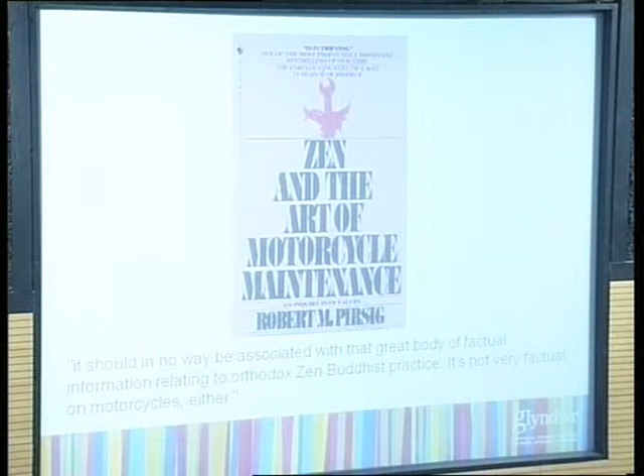Well, how does that relate? Actually the title has almost nothing to do with what's in the book. As the author says in his introduction, it shouldn't be associated with the great body of factual knowledge about Zen Buddhist practice, and it's not very good on motorbikes either.

And that's a bit like this talk, in that this is a personal journey through things that I think are interesting in the aerospace industry. So it's not very historically accurate.

Also I'm aware that there's a wide variety of people in the audience. I see some people here are stress engineers in composites, and others are from a completely different background. So I've tried to keep it as general as possible and not put into too much detail. Hopefully it's factual, but it won't go into too much detail.

One thing which comes through in the book, however, is the pursuit of quality and what quality means. And you'll find that quality and how to make things well is intrinsic to what I do. The other thing that comes across, which is probably not so good, is it's clear that the central character has sometimes been completely mad. So hopefully that doesn't come across. They've clearly had some kind of a breakdown.

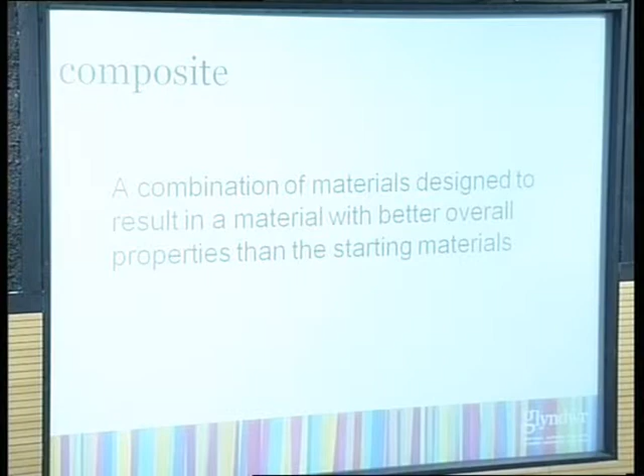Let me start off by defining what a composite is. My definition, which is fairly commonly adopted, is it's a combination of materials designed to result in a material with better overall properties than the starting materials. So we're putting things together, and in some way we're trying to make a product which is better than the things we started from. The things we tend to put together are some kind of reinforcement, and then something to protect the reinforcement.

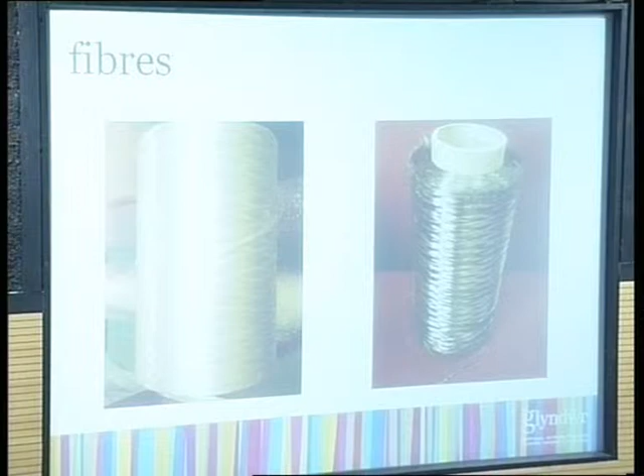It might be long fibres, it might be whiskers, it might be particulates. This is what fibres will typically look like - the one on the left is glass fibre, and the one on the right is carbon fibre. There's a whole range of ways of turning these into a composite, and if anybody's interested, we've got a very good MSc course you can come find out about. On the whole, we tend to weave the fibres together in various textile structures and infiltrate them with resin and cure them.

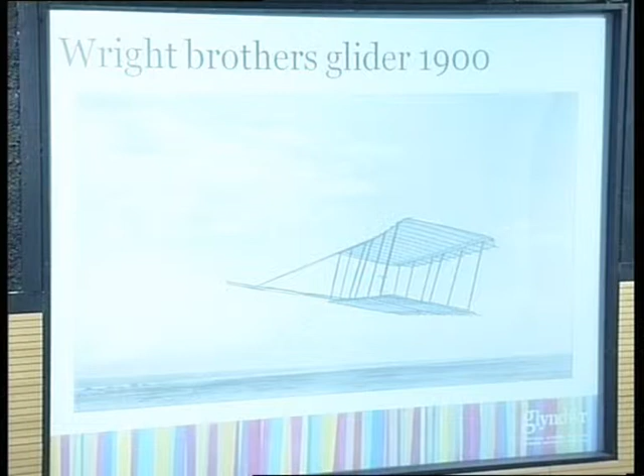But clearly before they made planes, they did something else - the Wright brothers were bicycle makers, they had a bicycle shop. But what do we get from the Wright brothers?

They put together airplanes from wood and from cloth - a wooden frame and then cloth over it to provide the flying surfaces. They changed the shape of the wing in order to control it. Nowadays we use flaps, but actually there's a lot of discussion and research work on wing warping again, under a different name, but that's what it is.

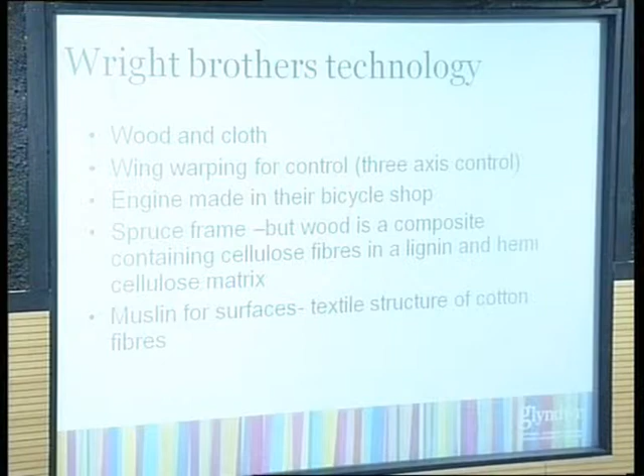They also were the first people to understand control. They made their own engine in their bike shop, with a wooden, spruce frame. But if you look into the structure of wood, wood itself is a composite - it's essentially cellulose fibres in a lignin matrix. When you make paper, all you're doing is extracting those fibres out and putting them together. And then they used muslin for the control surfaces.

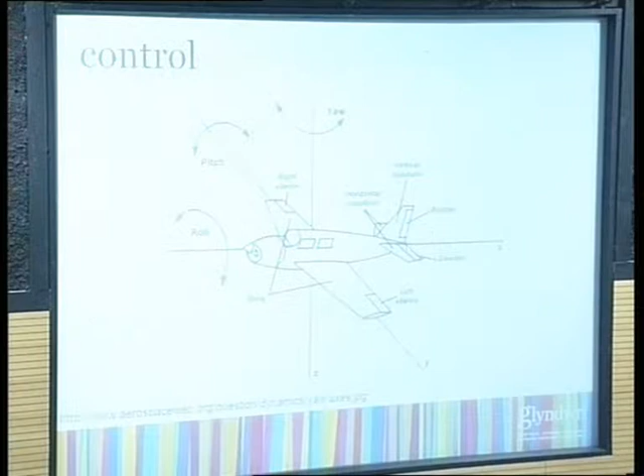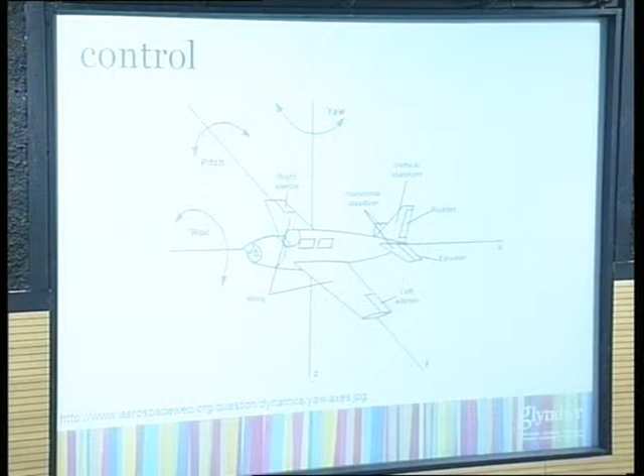This is the three directions you can change in flight: roll, pitch and yaw. That was really understood first by the Wright brothers from their experiments with a kite. But going back to the wood fibres - well, wood fibres are just paper when you put them together.

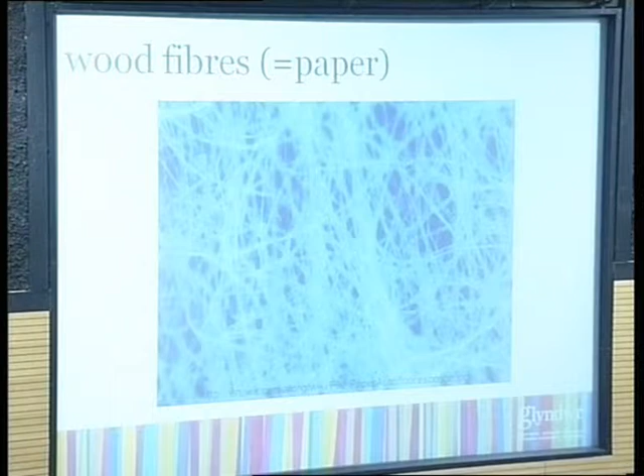Here again there's something fortuitous, in that before I came here I lived for about 4 years in a paper science building with a paper machine, which is the hottest, dampest thing you can imagine, amongst paper scientists. And one of the really critical theories of composites is known as the Cox theory, proposed by H.L. Cox in 1952. The Cox theory is all about paper, not composites, and it turns out it works really, really well for composites.

It's dreadful for paper, it doesn't work at all, and that's because the assumptions are wrong. What Cox assumed was that the fibres were in some kind of a matrix, but you can see from this picture it's just a network of fibres that touch at different points. So composites and wood and paper are actually quite closely related.

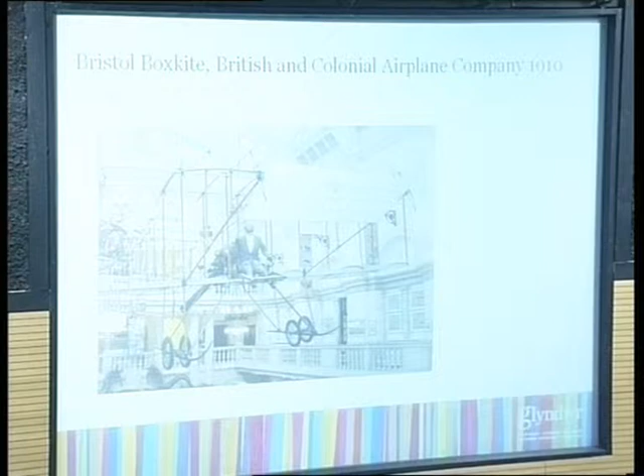So I want to move on a bit further and show you this picture. This is a Bristol Boxkite. That picture was taken in the museum in Bristol, and most of you probably don't know that I was born and bred in Bristol, so I spent a lot of time in this museum as a child. There are no longer any original Bristol Boxkites left, but there were 3 box kites remade for the film Those Magnificent Men in Their Flying Machines. After the production, one of them ended up in the museum at Bristol, one's in the Shuttleworth collection, and another one went to Australia.

So why am I showing you this? Well, this goes back to Sir George White. Sir George White originally ran an electric tram service. He had the first tram service in Bristol, and then he expanded out to London. He also went into the manufacture of buses.

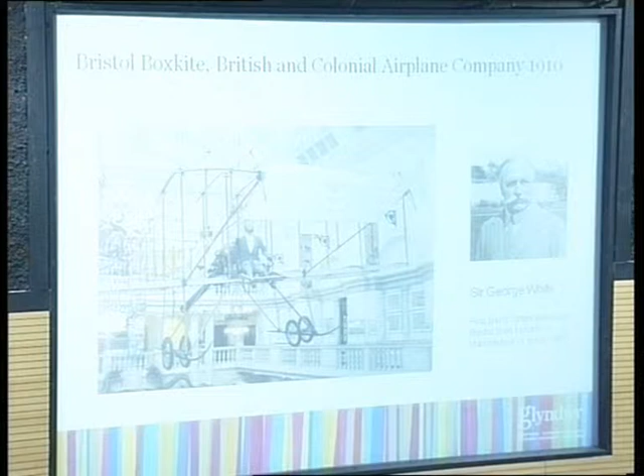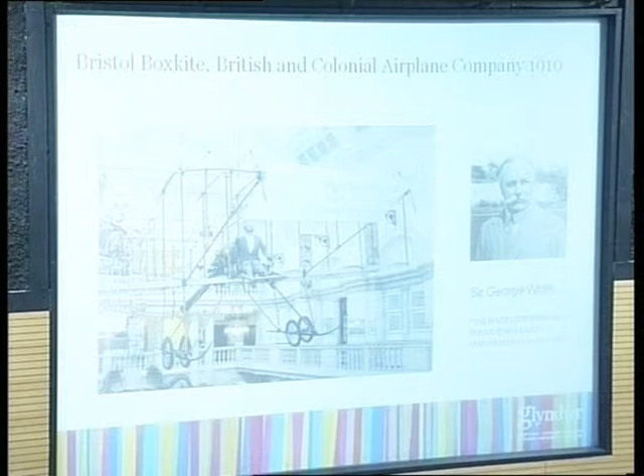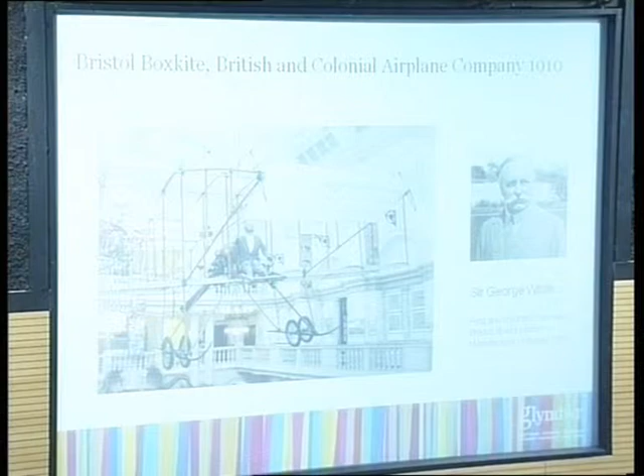As a child in Bristol, as a teenager, I went to a school in the middle of Bristol, and its playing fields were actually outside of Bristol, so we had to go by coach out to the playing fields. We used to pass the Bristol bus factory - okay, this was the 1970s, but it still existed then, it doesn't now. It was really odd because they had to move the buses around from place to place on site as they were being made. You'd often pass the site and there'd be a double-deck bus, but it would just be the floor and the wheels with somebody sitting on a deck chair driving it round from one point to another as it was being made.

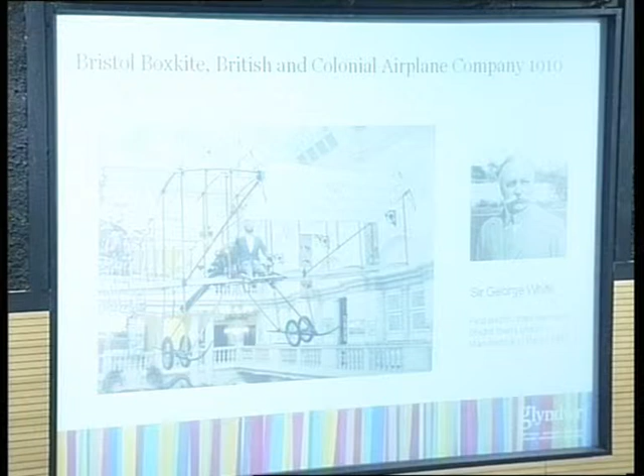Anyway, so Sir George White started building aeroplanes in a tram shed. The tram shed was in Filton in Bristol. Filton may register with some of you. The British and Colonial Airplane Company went through lots of changes. It became the Bristol Aeroplane Company, eventually became British Aerospace, who were then one of the founders of Airbus.

So actually, this was the first Airbus product. Now you may think that the madness is coming in again, but some of my time, as Leslie said, is spent out at Hawarden, where of course we get plentiful supplies of the Airbus House magazine, which I dutifully read when I'm having a coffee. And what did I find in November's issue but this: the landing gear systems test facility at Filton is named after Sir George White. So it's not just me that spotted that.

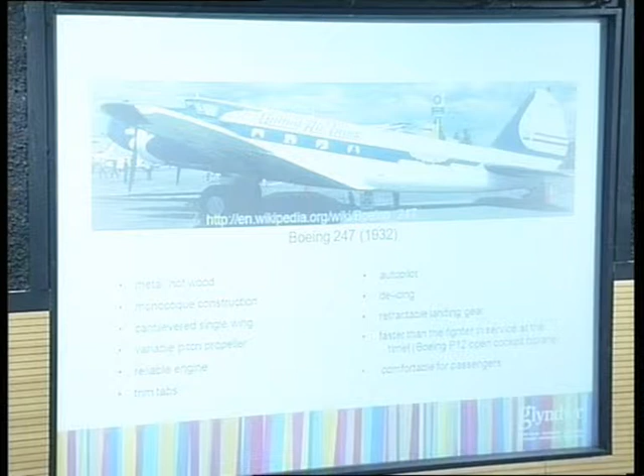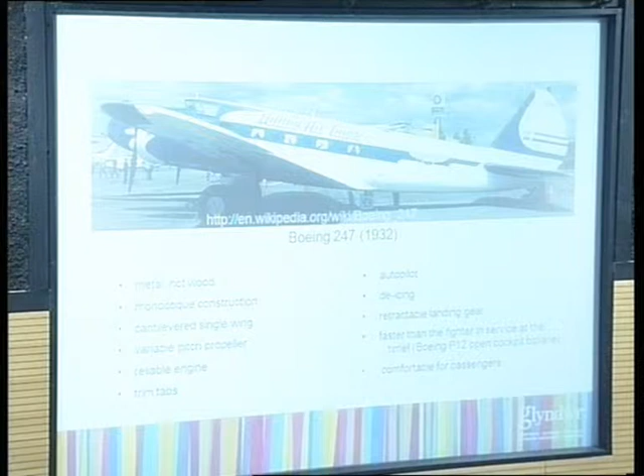So let's move on a little bit now. We had lots of wooden biplanes, and then suddenly on the scene came the Boeing 247, which was a revolution. Aluminium became readily available, and suddenly we went to a system which looks quite different - it's metal, it's got a reliable engine, trim tabs, an autopilot even then, de-icing, retractable landing gear, not landing gear that looks like it's been stolen off a pram, and it was generally quite comfortable. It was actually faster than the fighter that was in service at the time.

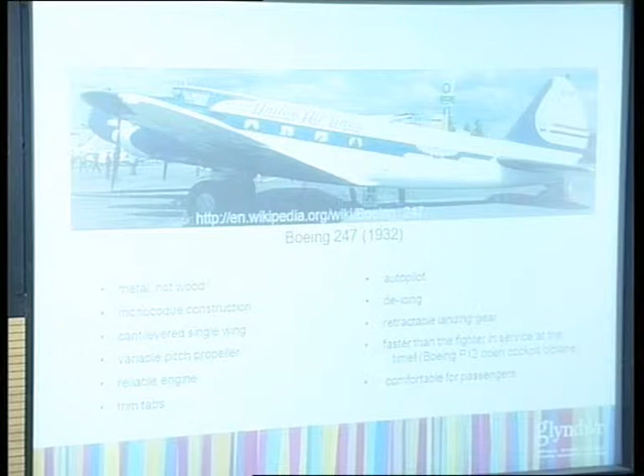Except that they've actually gone back, for some versions, to wood and cloth. There's a fleet of these run by the North Koreans, and they've gone back to wood and cloth because it's stealthy - there's no radar cross-section. A very simple solution. It's like when the space race was on, the Americans devised a very clever ballpoint pen to write in space, and the Russians took a pencil with them.

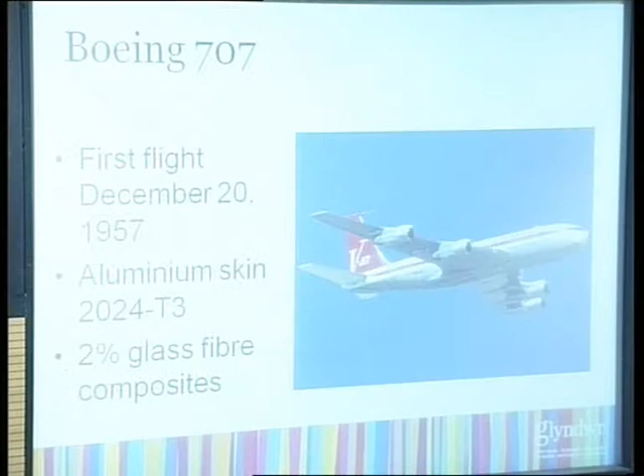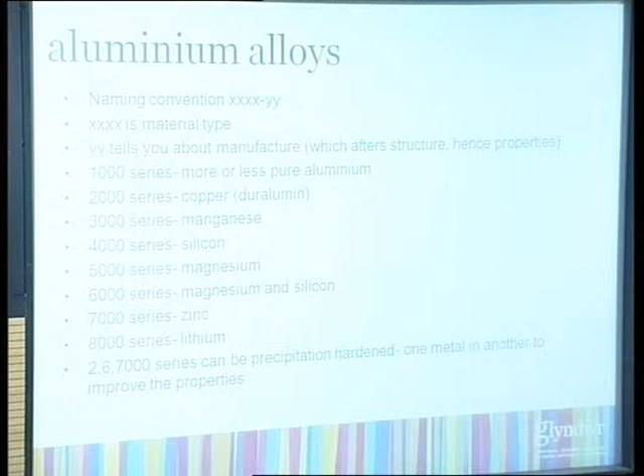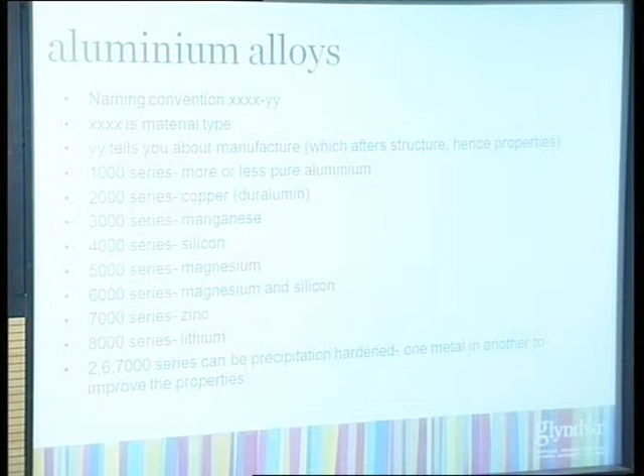I gave you the name of this alloy, 2024T3, and I need to explain what it is. Aluminium alloys have this naming convention, XXXXYY. The XXXX isn't a swear word, it tells you what the material type is, and the YY tells you about how it's been manufactured. There are various series, so 1000 is more or less pure aluminium going through, but some of these can be precipitation hardened, the 2, 6 and 7,000 series. And what we're doing is putting one metal in another in order to improve the properties.

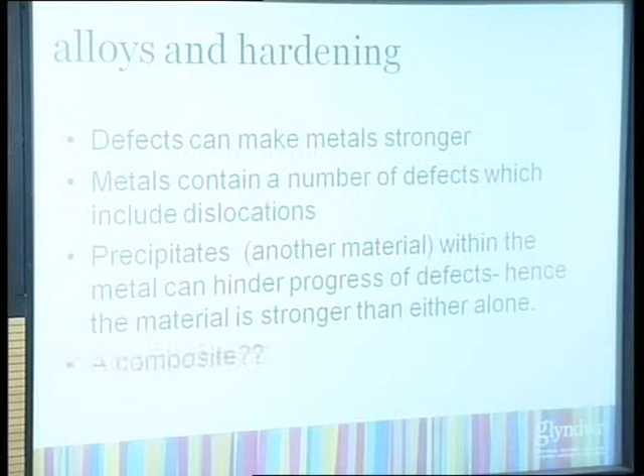Because in metals, if you have a pure metal, it's not very stiff or strong. What you need is defects, so we can put lots of defects in, and the defects are there naturally, and we can increase the number quite easily. If you stop the defects moving around by putting something else in there, then you can make it stronger than it was before. Okay, a metallurgist would tell you this is an alloy, but I'm telling you it's a composite, because that falls within my very liberal definition of a composite that I had before.

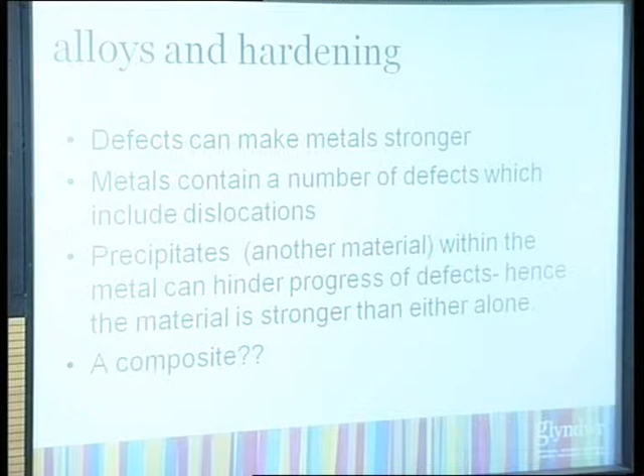Okay, so aluminium alloys, no, it's composite. So I'm just going to move through. The 737 came in '67, and the 320 came in, and there are a lot more composites used then, so some of the control surfaces and the back end are composite. And the 777, which didn't have so much in.

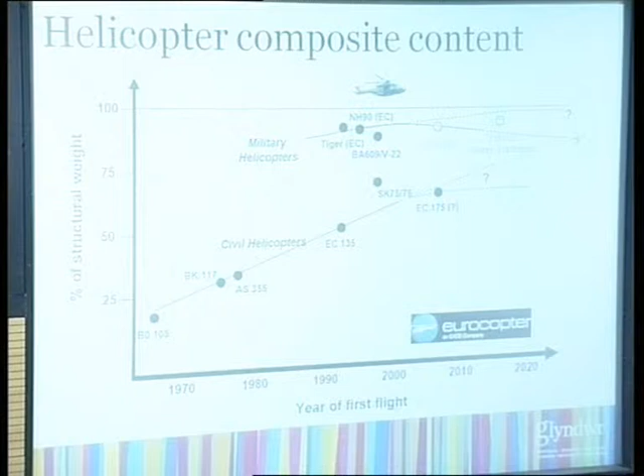So let's look at something else. Somebody I know at Eurocopter was kind enough to send me this slide. Actually, although we think we're doing quite well in commercial aviation, for 20 years there's been 50% composites in civil helicopters, and even more in military helicopters. And they still complain that they're difficult to work with, and wouldn't it be easier if we made this out of metal. But that's the way things have gone. Of course, in a helicopter, it's all down to pure thrust. There's not much in the way of aerodynamics, so you have to reduce the weight very quickly.

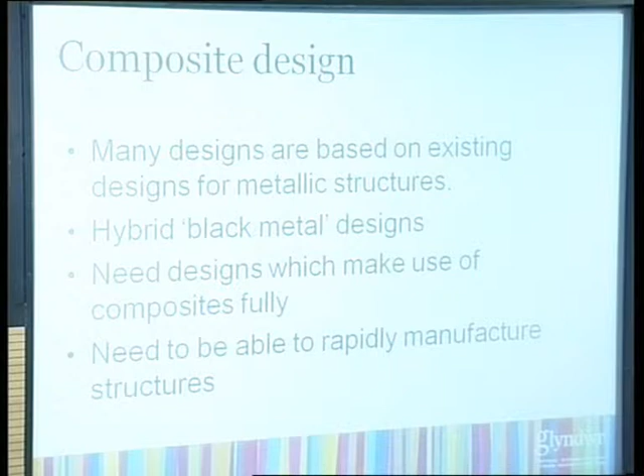Okay, so what about today's issues? What's important? Well, designing with composites is critical in order to get sensible manufacturable solutions. At the moment, we're going through an interim phase where a lot of the structures we make are hybrids between metals and composites. These are often known in the industry as black metal designs. And what we really need to do is move forward and use composites more fully, certainly in larger aircraft. That's quite a tough challenge, to make a big aircraft in just carbon fibre is tough, and there are lots and lots of issues. But we also need to be able to manufacture these rapidly.

So why are we going down the road of putting composites in aircraft? What is it that's driving us? Well, there's two answers to this.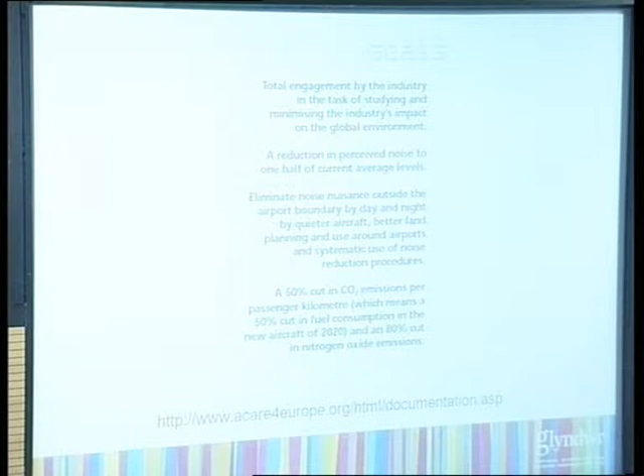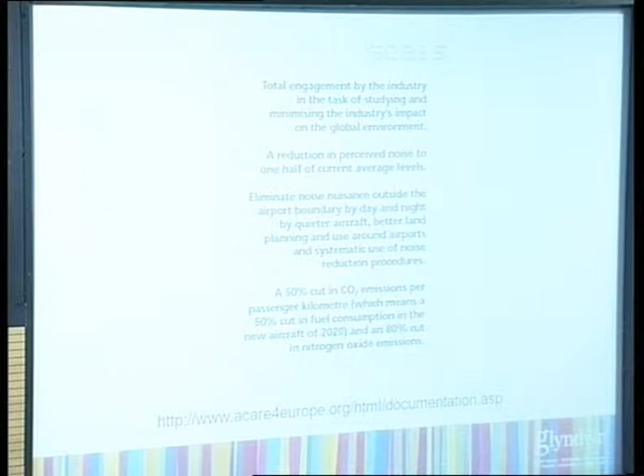One revolves around this, which is a vision for 2020. It's a document produced in Europe. This is an interesting document, but throughout it there are these little panels dotted around with various goals and targets. One of them, at the bottom here, is a 50% cut in CO2 emissions per passenger kilometre by 2020.

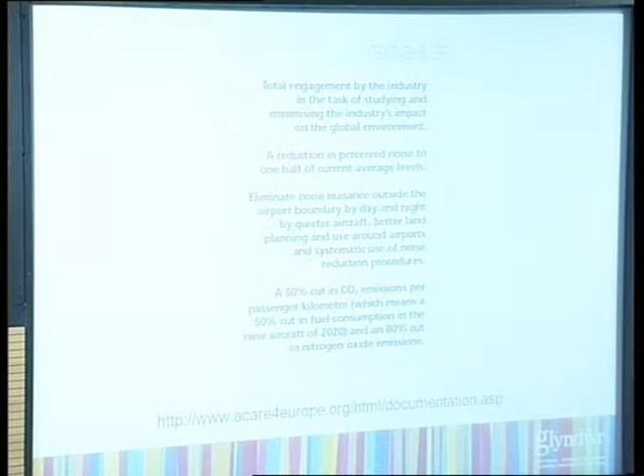That's a hell of a target. It's half the emissions. Oh, and by the way, you've got to cut nitrogen oxide emissions by 80% as well while you're doing it.

So how can we do that? Well, there's only one equation in here, so bear with me. The range of an aircraft depends on lots of things. One is the aerodynamics, how good the lift is compared to the drag. The thing in red tells you about the engines and how good they are, fuel consumption, temperature of the fuels, and things like that. And then the weight of the aircraft.

If you could halve the weight of the aircraft, you double the range. It's not easy. But if we want to reduce our CO2 emission by 50%, we've got to reduce the fuel burn by 50%.

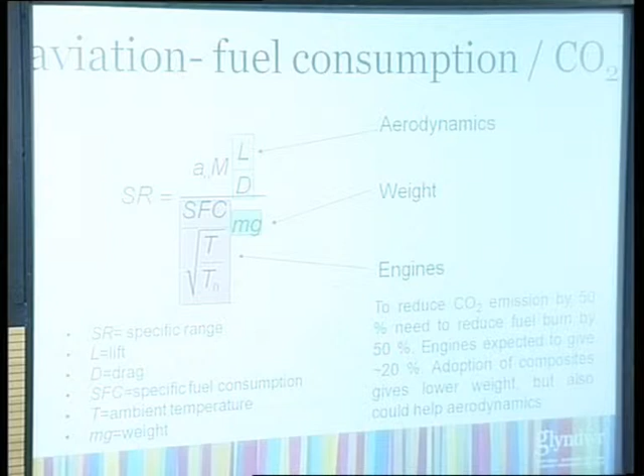The general view in the industry is that we'll probably get a 20% improvement by 2020 in engines. And don't forget, this is an ongoing process. It's not going to suddenly happen. The engines have been improving for years, and likewise with airframes, as different models come out, each one is a little bit better, a little bit lighter. So there's a whole range of 320s and Boeing 777s and so on.

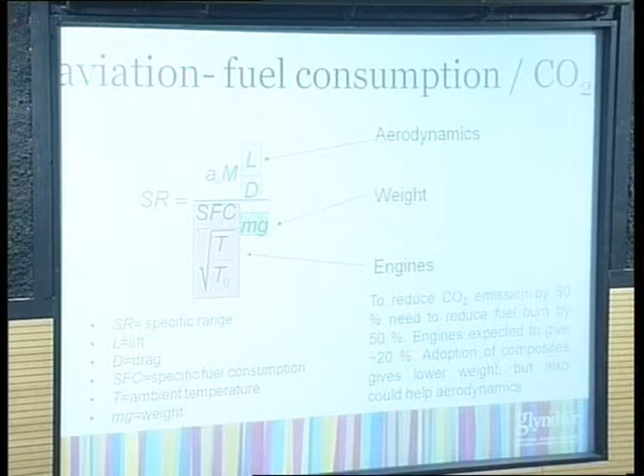But what we need is to adopt composites to give us lower weight, but it also helps with the aerodynamics. Well, how does that help?

And that's something that's quite easy to do with composites. If you want to do it in metals, it's much more difficult. There's a lot of machining to be done, and a lot of waste, and I'll come back to that in a minute.

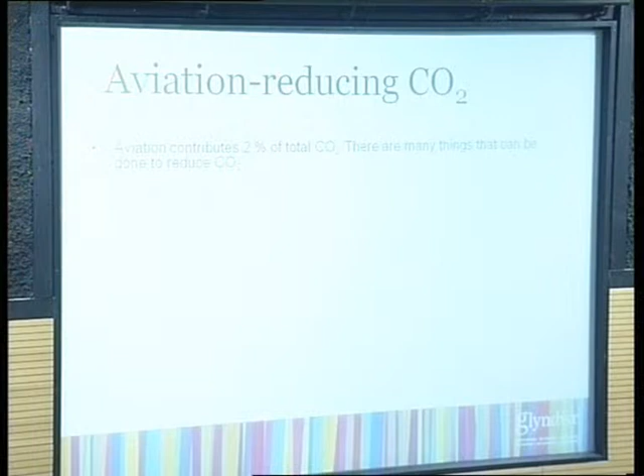So let's think about reducing CO2 and how we can do it. General estimate is that aviation probably contributes about 2% of global CO2 emissions. How does that compare? Well, it's a lot, but shipping probably contributes something like 4%. So you hear a lot of people talk about aviation and the carbon footprint, but actually the carbon footprint of shipping is twice as bad.

So what can we do? Well, actually air traffic management is important, the right choice of flight path. Eliminate unnecessary weight. So nowadays, rather than taking on boxes full of manuals, you take on an electronic flight bag, which is either an organizer or a laptop with all the manuals on the hard drive. And there's some other things that you perhaps wouldn't think of in order to reduce the weight of a plane.

One is to wash the engine out, which sounds mad. But you get a build-up of soot in the engine, and if you wash it out, you reduce the weight of the aircraft. Something like, well, American Airlines reckon that this saves them about 4 million gallons a year of fuel, just washing the engines.

Jet A, about an hour before the lecture, was £4.30 a gallon. At LAX, it's $6.94 today, and that translates to about £4.30 a gallon, which means you're saving over £17 million by washing your engines.

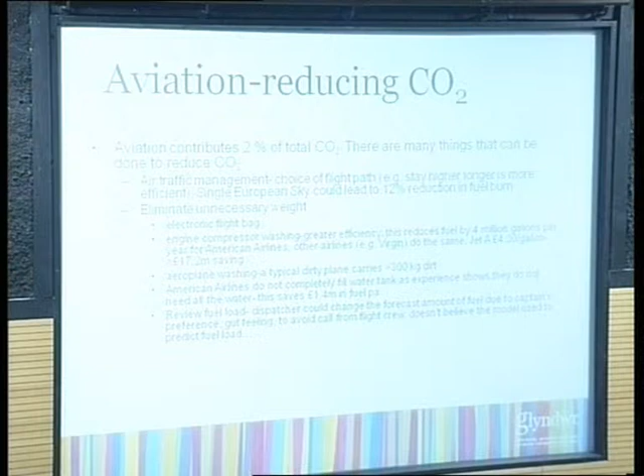The other thing is, don't carry things that you don't need to. For instance, American Airlines noticed that they didn't actually use all the water the plane could carry for service, so they fitted something on the hose. Filling up water on a plane is like filling up petrol in your car, you put a hose in and fill it up. They put in a little device which cost them £1, and it turns off the water when the tank's 3/4 full, because they don't need the full tank. They reckon that saves them about £1.4 million in fuel a year. And obviously, you're carrying less weight, so less CO2 emissions.

Also think about the fuel load, there are ways you can manage it. Maintenance also affects fuel burn. For instance, if you have to leave the power unit on because there's a fault somewhere else, that's costing you £4.30 a minute to run, and it's producing CO2.

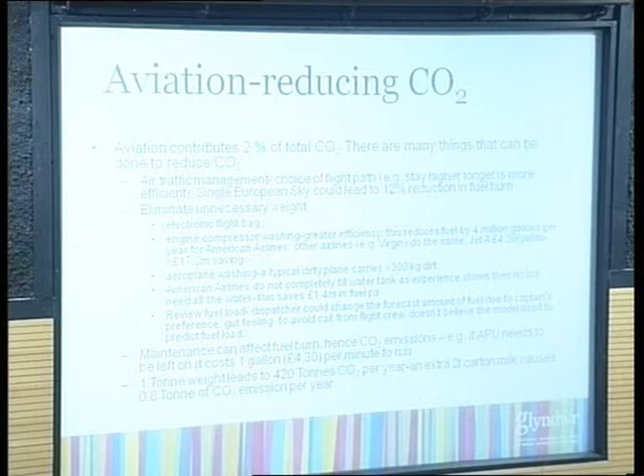Looking at what's important in materials, when you do some analysis, the thing that's critical for a wing, say, in bending, is the cube root of the stiffness divided by the density. If you come on the MSc, you get to prove that.

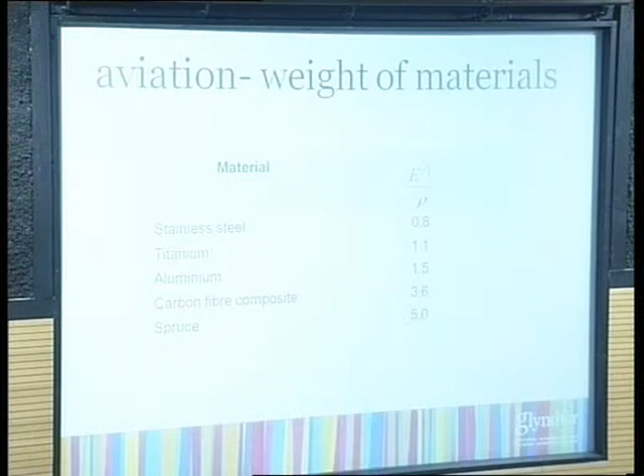So let's look at some values. There's stainless steel, titanium, aluminium. Stainless steel has been used in early planes, titanium is used particularly around the landing gear and so on, but aluminium is in most of the planes flying at the moment. But you see that carbon fibre composites give 3.6 against 1.5, so that's a hell of a difference. That means you can make your plane much lighter for having the same stiffness and strength and structure.

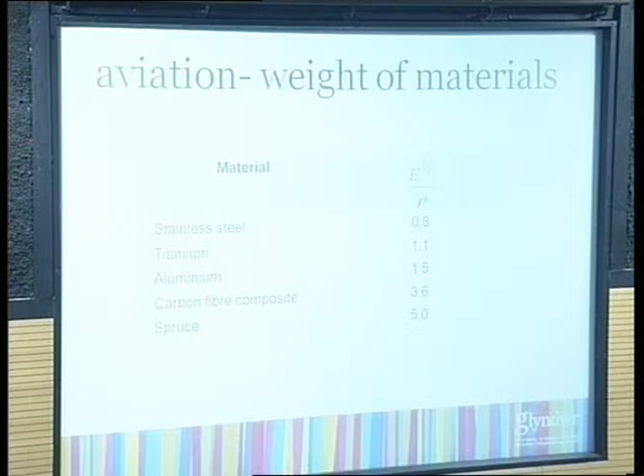And then the one at the bottom shows you that actually wood's better than all of them. So maybe we got it right in the first place. You can see certainly quite large structures can fly in wood. This was the Spruce Goose, made by Howard Hughes for the American government.

They did various trials on the 2nd of November 1947, resulting in it flying for a couple of miles, about 50 or 100 foot off the air, and it never flew again. Very strange, as is the name, Spruce Goose - it leads you to think maybe it was made from spruce. Actually, most of the structure was made from birch. It's one of these things that caught on in the press, the alliteration, and it stuck, but actually it's a largely birch structure.

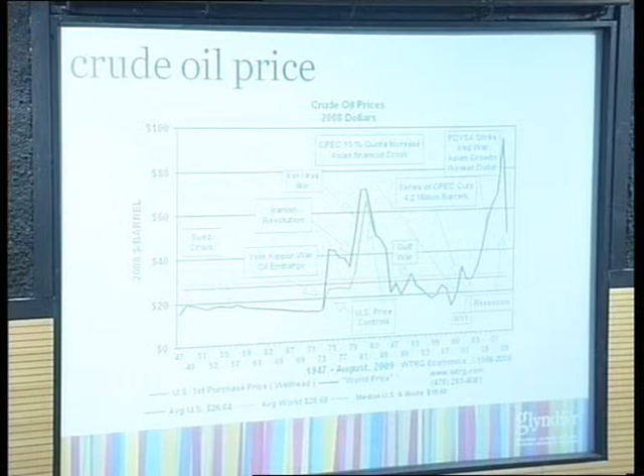But now that we've got back to this high price, back to the $100 a barrel, that's a hell of a price to be paying for your fuel - for your fuel to go up 5 times in price over the life of the aircraft. You've gone from running a nice business to the saying about how do you become a millionaire? You're a billionaire and then you buy an airline. It's an easy way to lose money, and a lot of airlines don't run in profit.

Something else before we move on is the buy to fly ratio, which is the weight of metal you buy compared to the weight in the final component. There are some extreme values. Fan blades are pretty good, so you buy 1.5 times as much as you want. But for some structural parts, you've probably only got 5% of the original billet left. So you buy a big block of material and mill it away to make your component, making lots and lots of swarf.

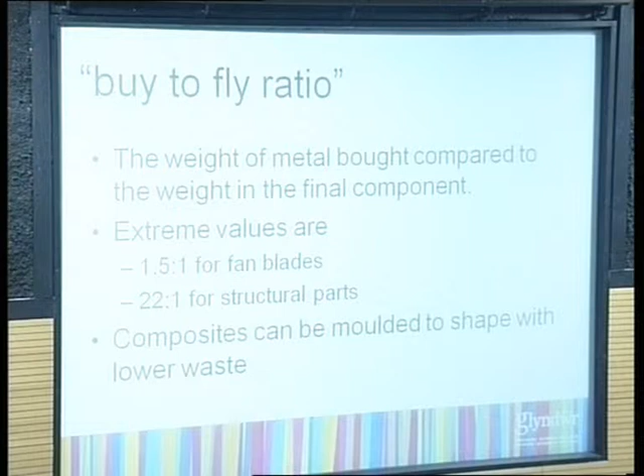You couldn't make that up, could you? In terms of a manufacturing process, that's 95% waste. Okay, it can be recycled. Whereas composites, you can mould to shape with much lower waste.

My boss, who unfortunately can't be here tonight, is very sceptical about these plastic aircraft, and every time I talk to him he just looks more and more nervous and goes more and more white. I think he's probably read this story that hit the papers about 3-4 years ago, about a former engineer at the Phantom Works who thought that perhaps composite plastic materials were not a good idea in planes.

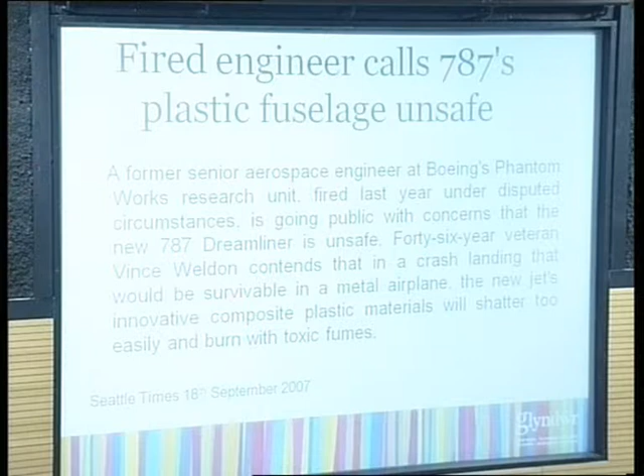But driving in those days was a really dangerous business. Most people were killed. As it turns out, Fangio was either very good or very lucky, because he lived until he was 84, retired in Argentina, and died of old age at home. But a lot of the people he raced with didn't. Perhaps what brings that home is this list I made of Formula One drivers' deaths in the past 30 years. Some of those names you'll recognise.

You've probably worked out from what I said about school buses that I was a teenager in the 70s, watching Formula One. Every race had a very similar pattern. We talk about it being boring these days and how to make it more exciting, but back then they also had a similar pattern, which is that at some point there'd be a huge crash. They'd have to stretcher somebody off, and there was always a hospital at every circuit with a surgeon standing by. During the race you'd get commentary on how the driver was doing and whether they'd been airlifted to a bigger hospital. It was practically every time they raced.

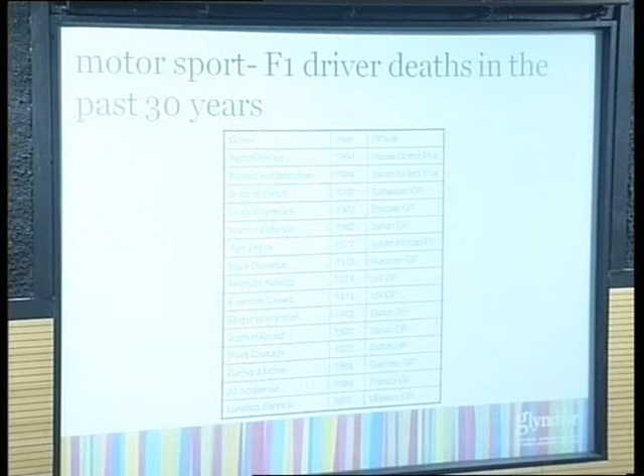You can see there were a huge number of driver deaths. I'll pick out one in particular: Tom Pryce. I picked him out because he came from Ruthin, just down the road, and he died in a really strange accident. He was killed by a fire extinguisher. How? He was racing, and one of the marshals was running across the road. The car hit him, killed him, and the marshal was carrying a fire extinguisher. The fire extinguisher then hit the driver and killed him too.

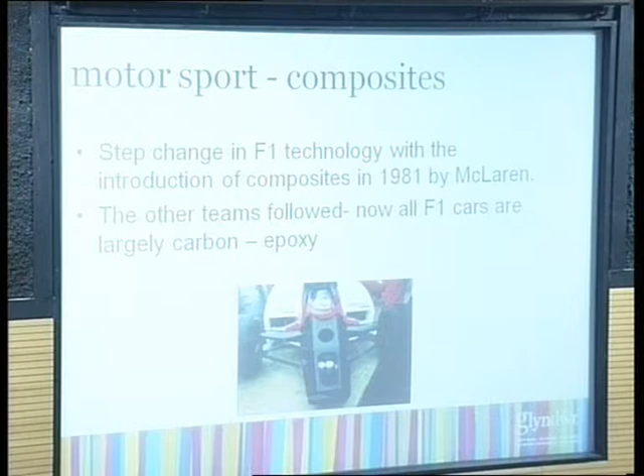Since then, lots of things have happened in Formula One. One is that the rules are very, very tight. But also, there was a step change in technology with the introduction of composites in 1981. It took a few years to get it right, but now you have horrendous crashes and people walk away.

This was actually at the same circuit, and you can see this car hit the barrier at about 200 miles an hour. But the central zone where the driver was is pretty much intact. Everything else around it has been crushed and absorbed the energy. The report in the next day's press said, 'I have a slight headache and a stiff neck, but other than that, I'm doing well.' In the 70s, he'd have been dead. That's the difference composites have made to Formula One.

There are other differences as well, and the rules are very tight. If you go onto the FIA website, you can download the rules. They're not protected, they're in a Word document, and that document is done in track changes, so you can see what last year's rules were. You find that the energy and impact deceleration these cars have to take every year just ramps up slowly.

So a mixture of engineering, getting the right material, and making sure you do lots of testing before you start. And we've gone from a sport that was really dangerous to one where you can survive the most amazing crashes. So maybe there's something for us to learn there in aerospace.

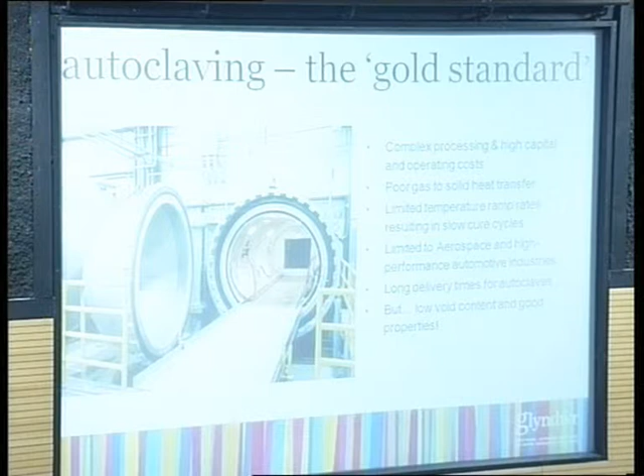Okay, so let me move on and talk about manufacturing processes for aerospace composites. Typically we use autoclaves, which give the best quality components, but they're very slow. Heat transfer in an autoclave is a very, very slow business. The challenge is to make this much, much quicker.

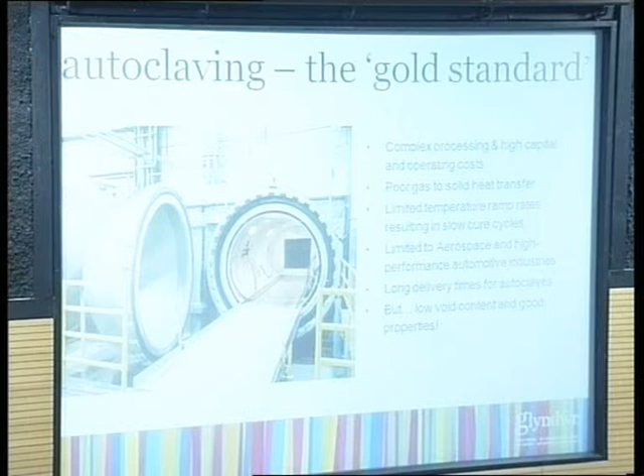So at the moment Boeing are producing the 787, Airbus are working hard on the 350. But the demand for these is comparatively low - these are long-range planes, big planes, intercontinental.

So they're built at a rate of about 1 or 2 a month. The 380, I think there were something like 13 deliveries in the first year, and that ramped up to 22 in the second year. So they're making about 1 or 2 a month, and these things are likely to be the same.

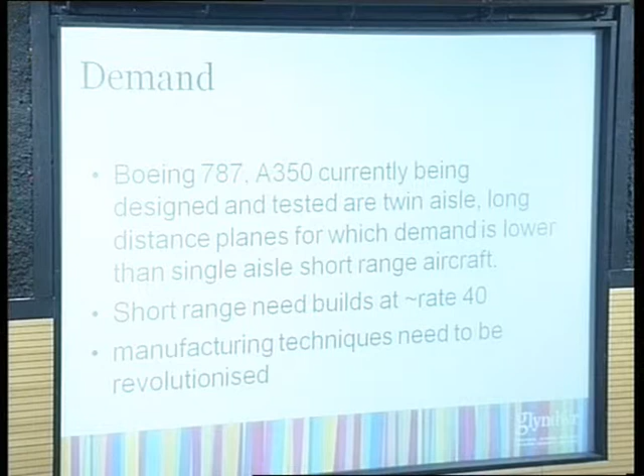But for short-range aircraft, things like the 320, you build at rate 40. Rate 40 is an industry abbreviation - what that means in reality is you're making 40 a month, or more than 1 a day. And suddenly the challenges become huge, and your manufacturing techniques need to be revolutionised to cope with that.

So how are we going to speed up making composites in order to make composite components at the speed we need to? Well, we're going to have to improve heat transfer. And if you think about an autoclave and what you're doing, it's basically like the oven at home.

So you'll have probably gathered that food is quite important to me. And cooking.

So at home, well, you use an oven, but actually it's not very good. Because you can put your hand in the oven - again, I'm not advocating this - and because heat transfer from a gas to a solid is pretty poor, you don't burn your hand, provided you don't touch the chicken or the sides. No, that's bad, don't do that.

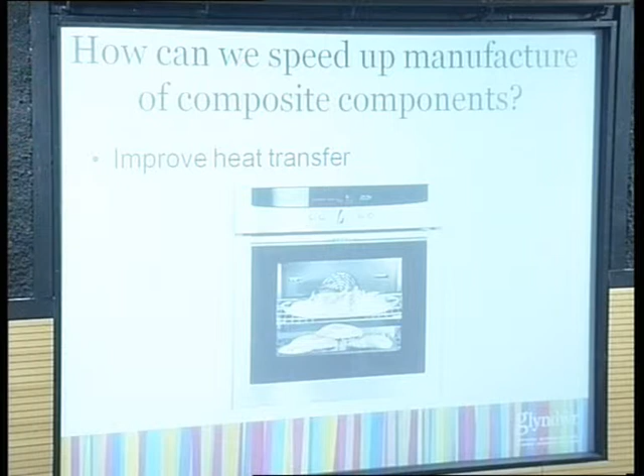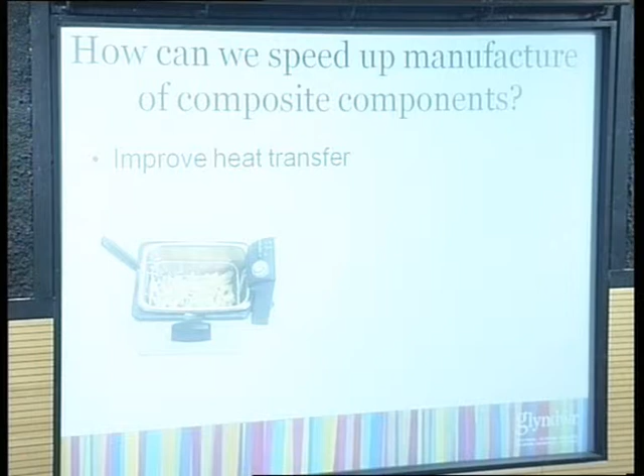So what do we do at home when we want to speed up cooking? Well, two things: either we deep fat fry things, or we microwave them.

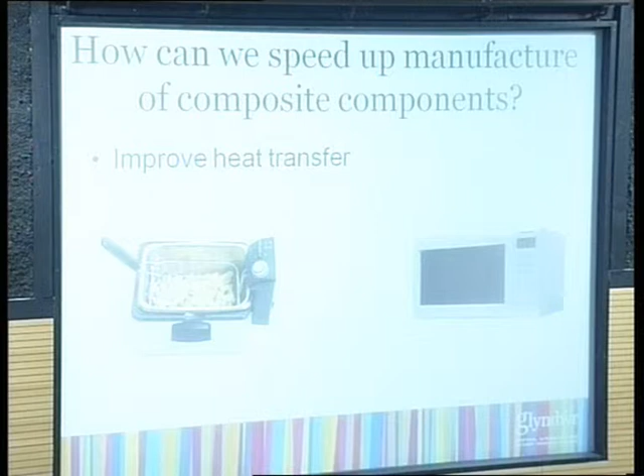You may think I'm going off at a tangent here, but actually that's exactly what we do with composites. So deep fat frying of composites - well actually that's a technique called Quickstep, and I'll be delighted to talk about that technique. There are basically two research groups working on this: there's a group in Manchester, which I used to work with, and there's also a group in Australia, and both groups are represented tonight. So if you want to chat to us afterwards, please do.

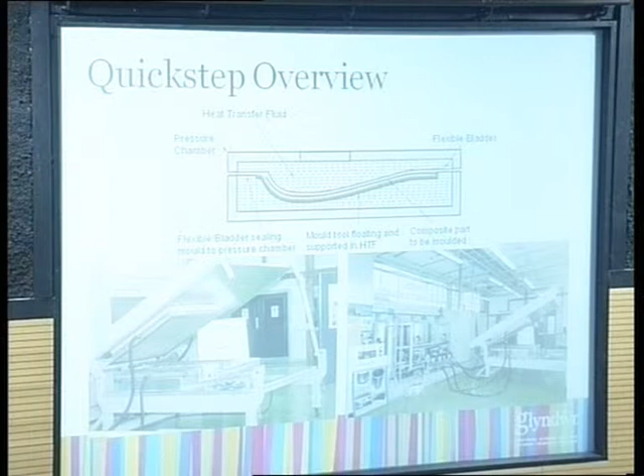So that's okay - you can make things much more quickly, because like deep fat frying, you get better heat transfer, and things cook quicker.

So what sort of temperatures are you achieving? Do you need to achieve? 180 - you can get 180. 190 at a push. So aerospace composites are fine.

And the other thing to do is maybe microwave them. Well, microwaving composites isn't quite so easy. It's something I've been doing for about 15 years now, maybe slightly longer.

I thought, how can I show you the problem with microwaving composites? I guess you're sort of familiar with it, because most people have put a plate with a bit of metal or something in the microwave and it sparks everywhere. And I thought, well, how do I show this?

And actually the next couple of slides came about by accident, because, to be honest, about a fortnight ago I lost my car keys. I couldn't find them anywhere. Now, you might have some trouble believing this, because this is my bunch of keys, and somehow I managed to lose those at home.

So I live about 50 to 55 miles away from here at the moment, so I had to come in by car. I borrowed my wife's car, which is very nice, much bigger than mine and much more comfortable. The only trouble is I normally listen to some music on the way in, and I couldn't, because my music was locked in the car.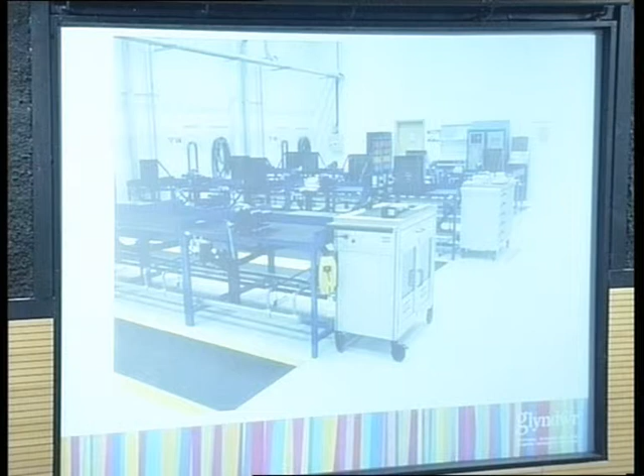So this is what it looks like: lab facilities, IT, lecture rooms and so on. And this is Airbus' bit, which is a fantastic training facility for preparing people for the 350 wing build, which is starting soon.

So just a few words about other associations. Obviously that one's important to us, but some of you will know I came from the Northwest Composite Centre in Manchester, and Leslie mentioned it — we still see that as an important link, and there are two or three people in the back who have come over from Manchester. We also have a relationship with Bolton, Liverpool, Lancaster. We work closely with the Welsh Composites Centre in South Wales, and we talk a lot to them.

About 2 months after the opening, I went to a presentation given by the director of the National Composite Centre, and he put up this slide, which he's kindly sent me, showing that we already appear on the map of regional composite centres.

Moving on to what we do, let's think about what the university does. The vision statement is that we're to become an indispensable, significant, relevant and expert partner in regional and national economic and social development. And that's the crest. For those who don't read Welsh, it says confidence through education.

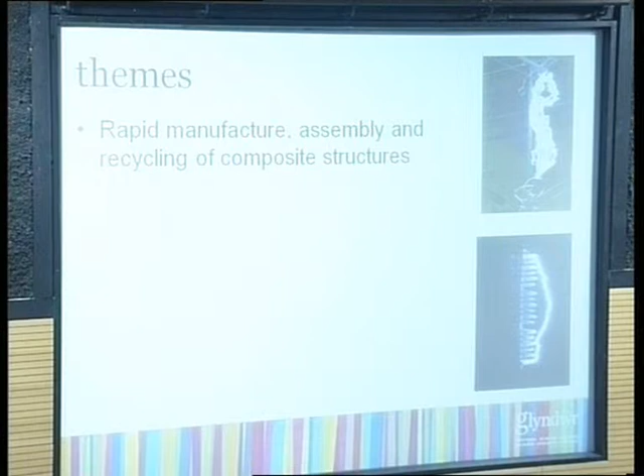So, themes. Our general area of interest is rapid manufacture, assembly and recycling of composite structures, and the assessment of fitness for purpose of these structures, because it's no good making something fast if you make rubbish. It's back to the quality thing I mentioned at the beginning: you need to make it fast, but make it well. It's got to serve the purpose.

And of course, with the university's emphasis on industry and working together, there's clearly close coordination with industry and its requirements. You should never make the mistake of thinking that's entirely the aerospace industry, because although we're based with Airbus at Hawarden, we're interested in a whole range of sectors. I've put up some pictures on the right to show some of the work I've done in the past.

Overhead lines tend to have ceramic insulators supporting the cable, but National Grid, about 15 years ago, started experimenting with composite insulators, and I got involved in testing some of these. I have to say, it's some of the best fun I've ever had. The picture at the bottom looks poorly taken, all fuzzy with blobs, but actually that's a pretty good picture.

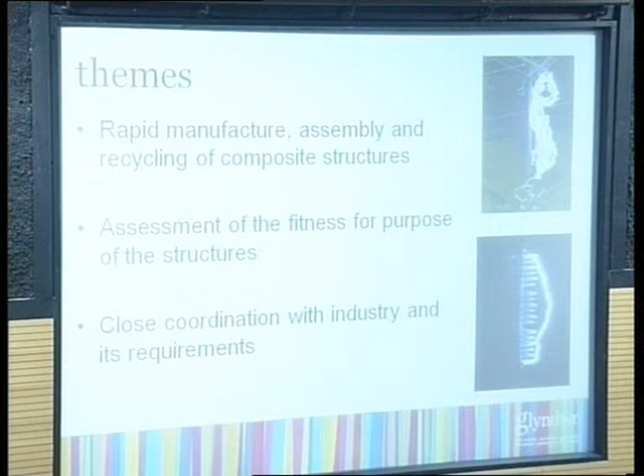So, wide variety of interests. Something that's come on the horizon more recently, announced a couple of months ago, is the Astute project, of which we're part - in fact we're the 3rd biggest partner after Cardiff and Swansea. Astute is an Assembly Government funded programme, through the Welsh European Funding Office, WEFO, to support SMEs in the convergence area.

So there's a whole range of things we're interested in, and a whole range for which carbon fibre is going to be important - aircraft, wind power. Wind power is coming to North Wales in a big way. Automotive, not so much, but other transport applications.

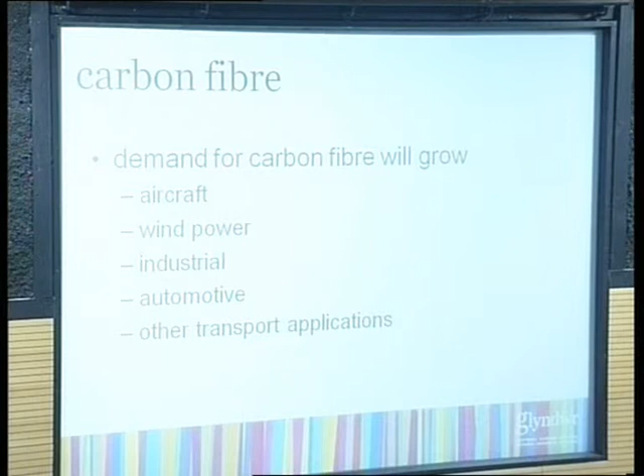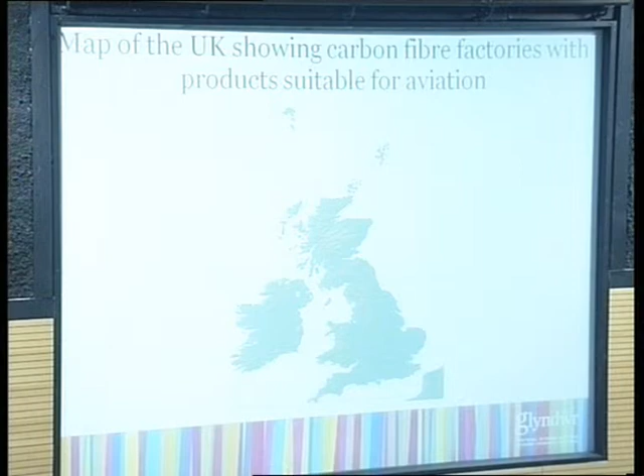So I thought I'd show you this map of the UK showing where all the carbon fibre factories are. There is actually one carbon fibre factory, up in Scotland, but it doesn't produce a suitable grade for aviation. So we have a big problem as a country. We have a prepreg supplier on our doorstep, Cytec in Wrexham on the industrial estate, and others around the country, but we have no supply of carbon fibre as a country.

So I thought I'd bring that up, and I'm sure if you want to chat afterwards, Andrew will talk to you about that one.

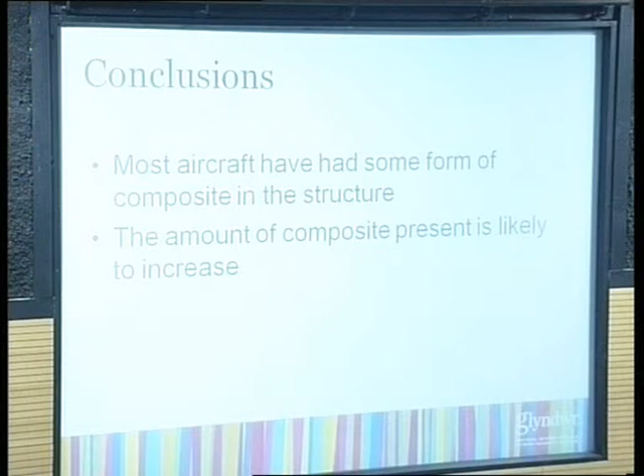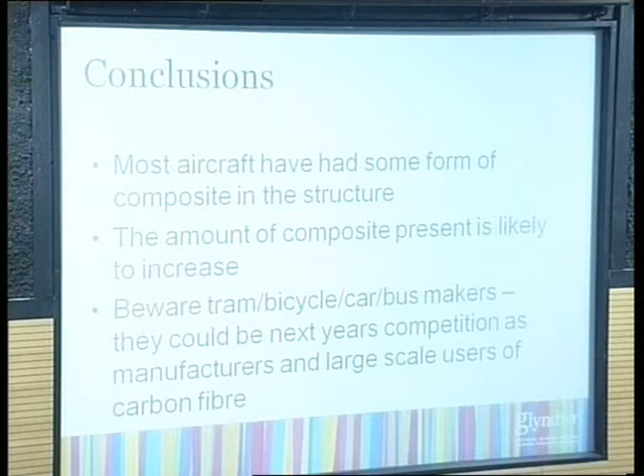So some conclusions then. According to my wacky definition of composites, most aircraft have had some form of composite in the structure. We can only see that increasing because of the pressures of CO2 emissions and economics. And the last thing is a message for aircraft manufacturers: beware of tram, bicycle, car and bus makers, because they're next year's competition, either for the fibre or for the business.

Okay, so I'm just going to finish off with that, which reminds me to shut up. Thank you very much.